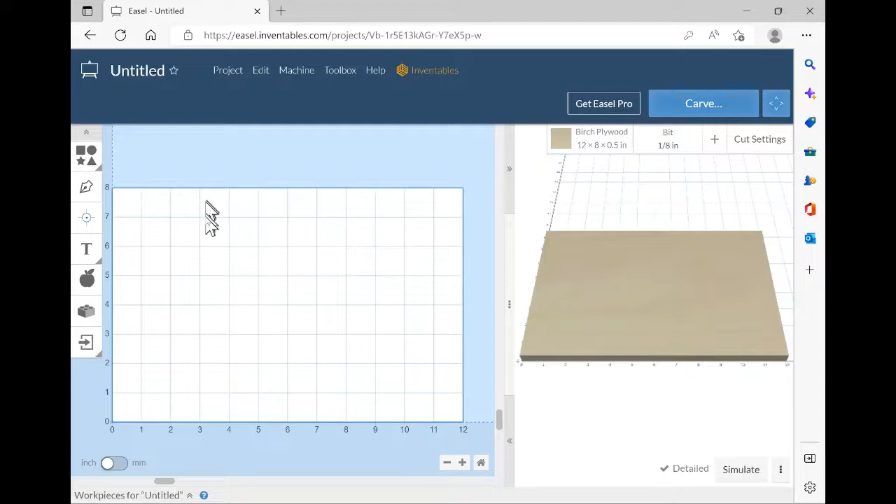For this one, we're going to create a new project. This new project is going to be a knob that we use for clamp downs. We're going to create this a fairly small project, but there's some complicated elements to it, and that's what we want to go through here.

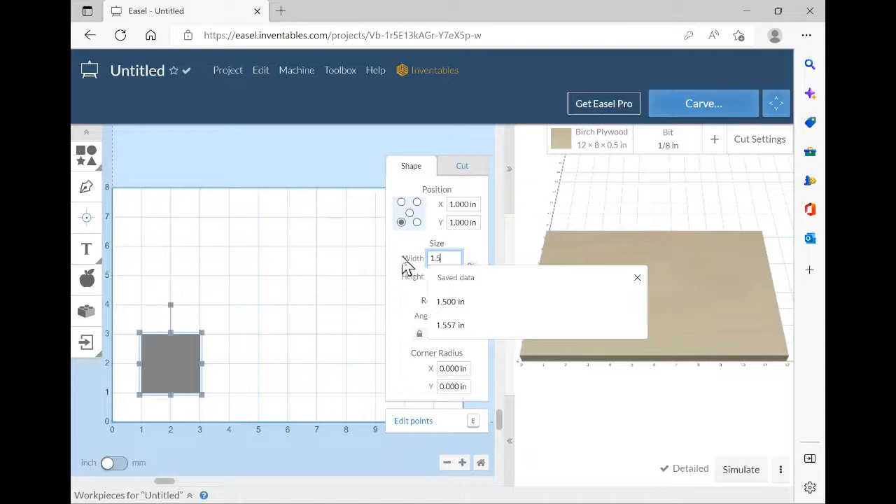So let's start by creating a rectangle. I'll go over here and change the size. It's going to be 1.5 inches wide, and the height is going to be 5/8 of an inch. I can type 5/8 in there, or 0.625.

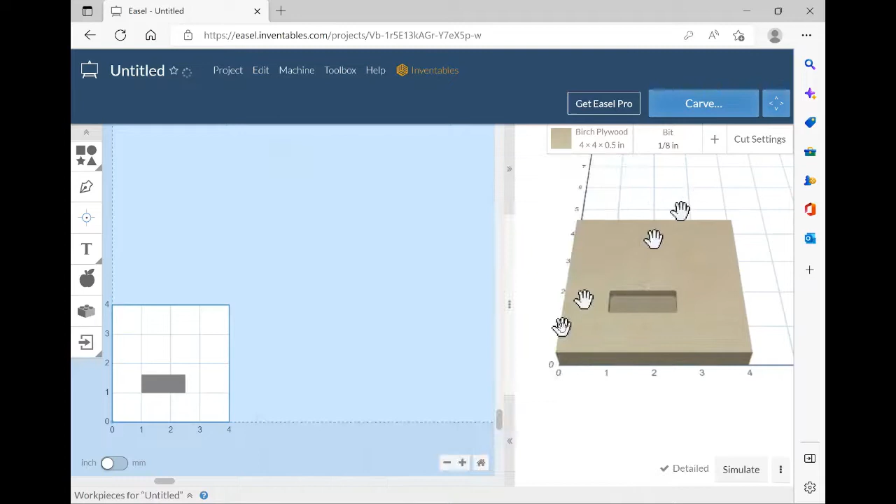Now, that's a pretty small object for this board, and the scrap piece I'm going to be using is kind of small, so let's change this to 4x4 and make it a small board. When I do that, I can use my home button down here and make my graph paper a little larger so I can see it better. I'll click the home button, and now this is centered in there. So I'm going to center that, edit, send it to material.

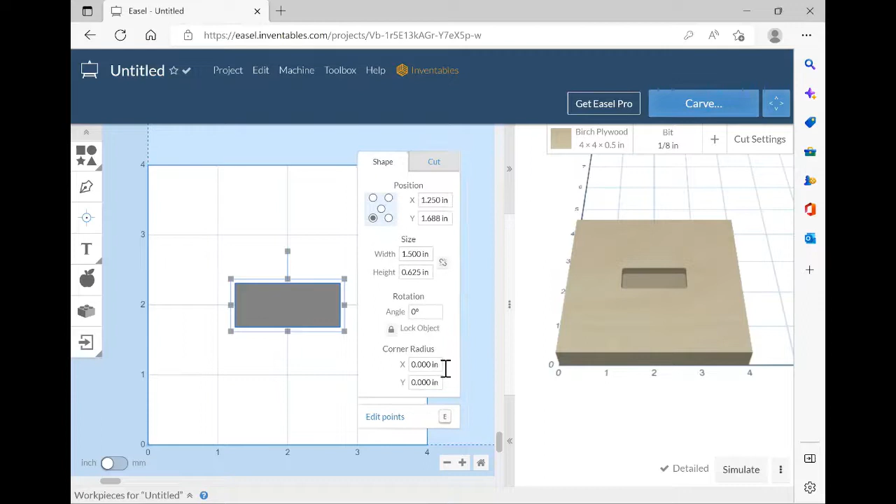Now before I forget, we do want to add some radius to this, so it looks more like a knob. Again, I'm going to add a quarter. Now it's more shaped, more like a knob would be.

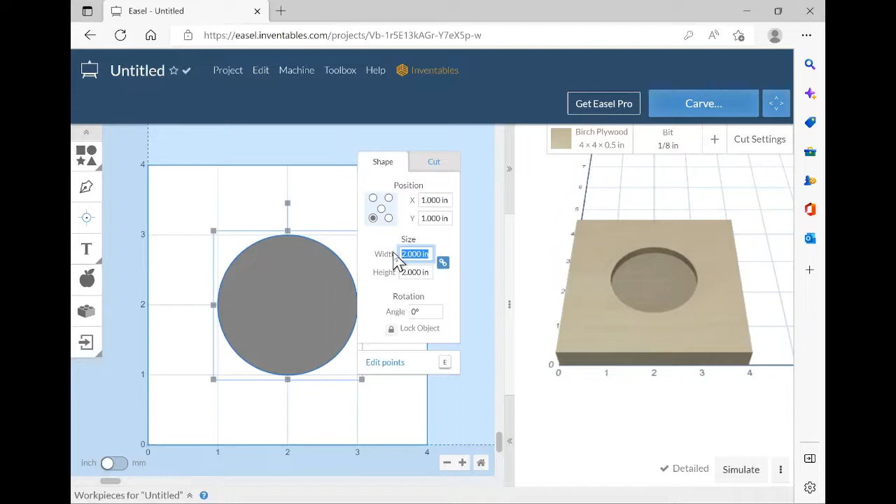The knobs usually have a rounded center, so I'm going to add a circle to the center. In a circle, we're going to link it. Remember, if you do a circle and do the width and height different values, then you have an ellipse. So if you want them both the same to maintain the circle, just click that link button. I'm going to make it 3/4 of an inch, and we're off and running.

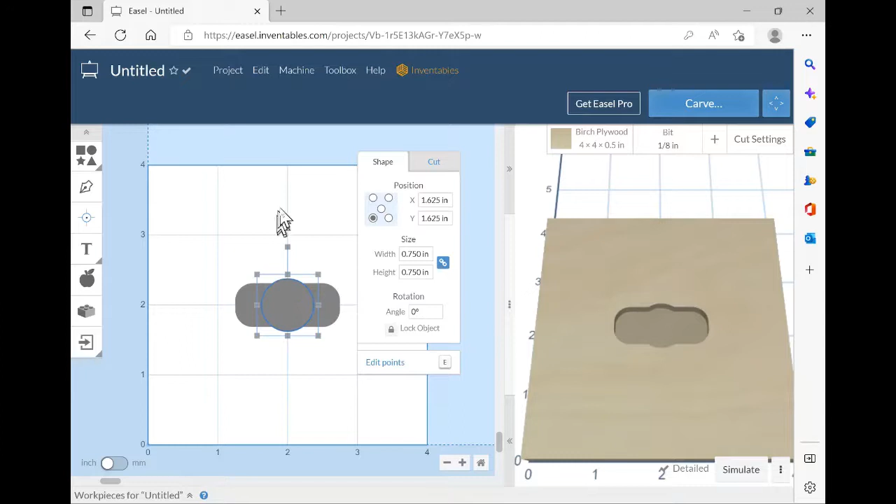Again, same thing, going to center the material. If you look over here now, we see that we have these two objects on top of each other. Over on this side, they create on the piece of wood what looks like the top of a knob, which is great, that's what we want. But in order to maintain that, we need to combine these two. So I'm going to use the combine feature.

Now nothing's changed over here, it looks the same. But now when I click on it, there's only one piece there. I moved it a little bit, so I'm going to make sure it's centered again. So now it's one piece using the combine function.

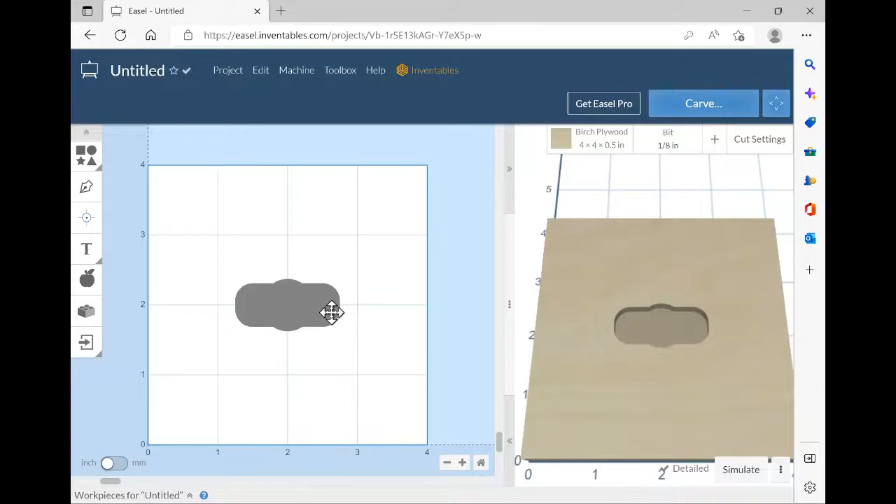Before we go too far, I'm going to copy this. Edit, copy, and I'm going to paste it. Now I'm going to take this and move it over to the side here a little bit. I'm just going to move this out of the way a little.

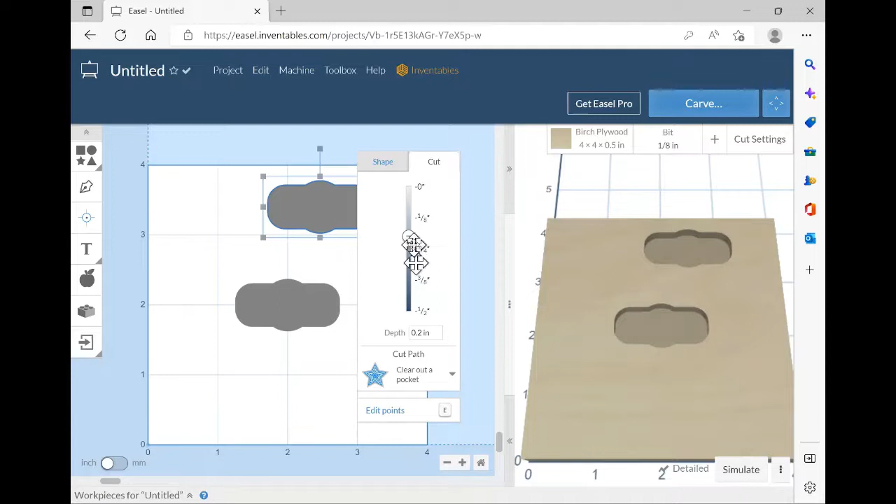Now I'm going to take this and change it. This one we're going to cut all the way through. I'll make a hole, see, there's a hole here. But I don't want to cut the whole pocket out, all I want to do is cut outside the shape. So now it's cutting my knob out.

See it? It also has tabs, and the number of tabs are 4. Let me see if I can move this up a little bit. There we go. I'm going to change the tabs to 2 because I think 4 tabs is a little much, but I'm going to move one to this side. All right, so we have one on that side and one up here on the top.

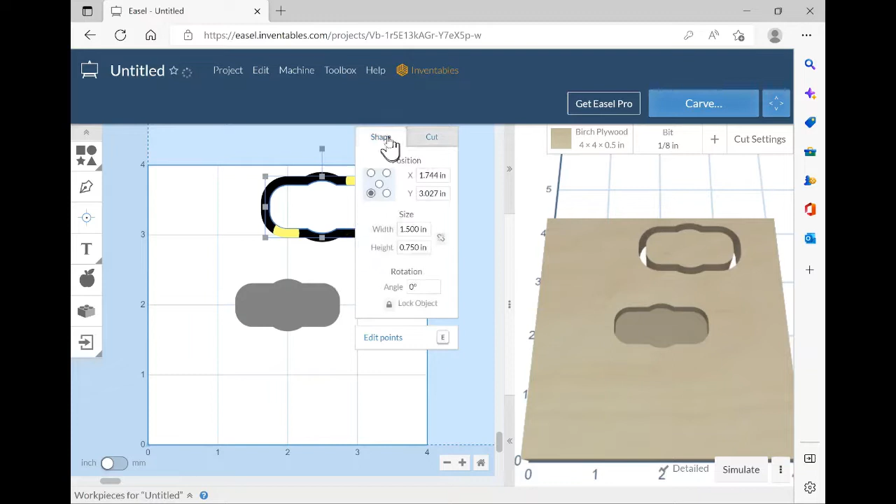Now, if I click on it again, you'll see my tabs. Let me move this out of the way. So now we have an outline to cut out our knobs, and we have 2 tabs on it, so it's ready to go.

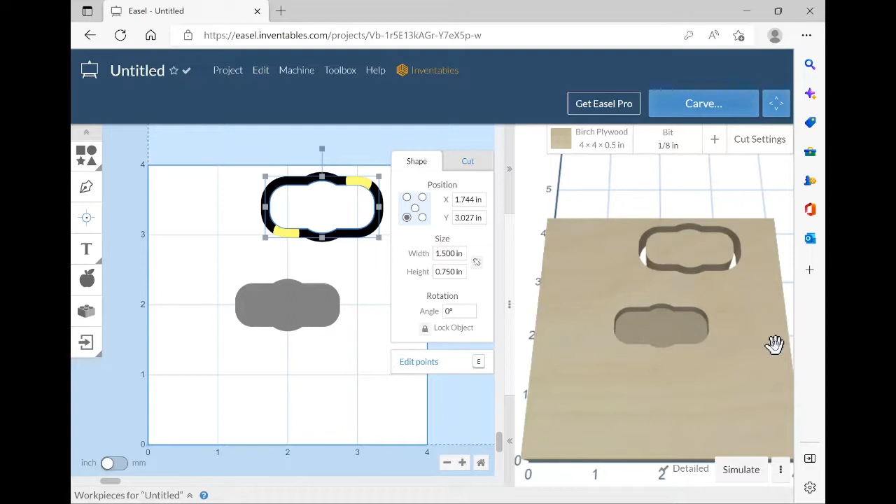At this point, I'm going to remember now the knob itself, the top of the knob is on the bottom of our piece of plywood, so we're working upside down here. So I'm going to put a circle on it again.

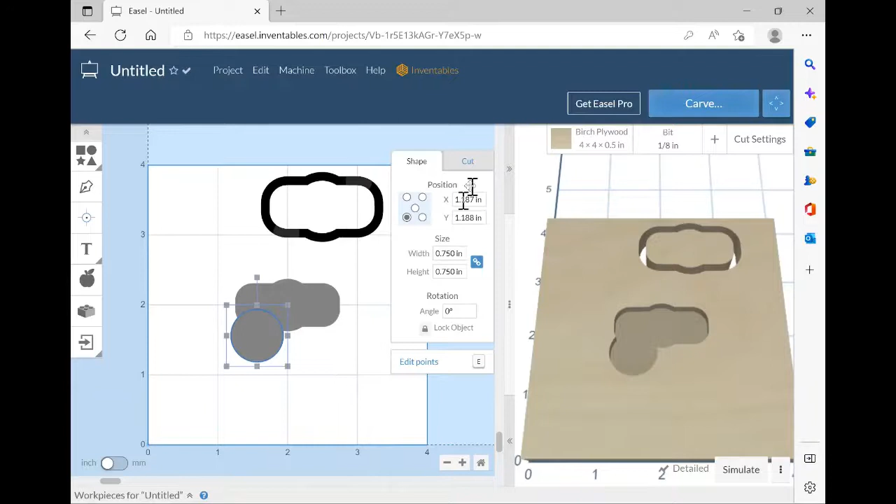Let's add another circle, and this one is going to be, again, 3/4 by 3/4. I'm going to link it so it doesn't become an ellipse. What I'm going to do here, I'm going to move it just a little bit so you can see it a little better. I'm going to change the cut to 0, in other words, I'm not going to cut it at all.

So what have I done? I actually have this thing here, and if we take it and move it into the middle, you'll see that it becomes a part that's not cut out yet. So let me go center this.

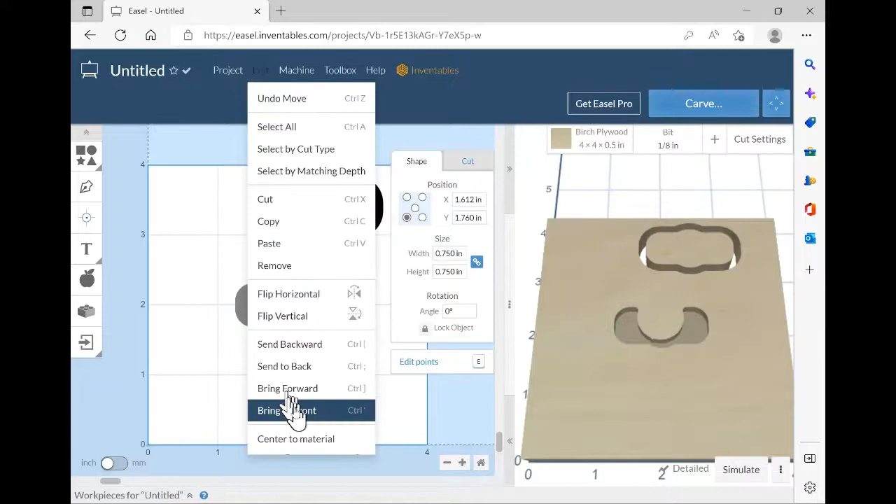Okay, and now if you look at what we have here, and we don't show everything, but if I take this now and put this to the center as well, what do I have now? Look what I have, I have a knob. I have a center portion that's not been cut yet, and I can cut out around the whole thing.

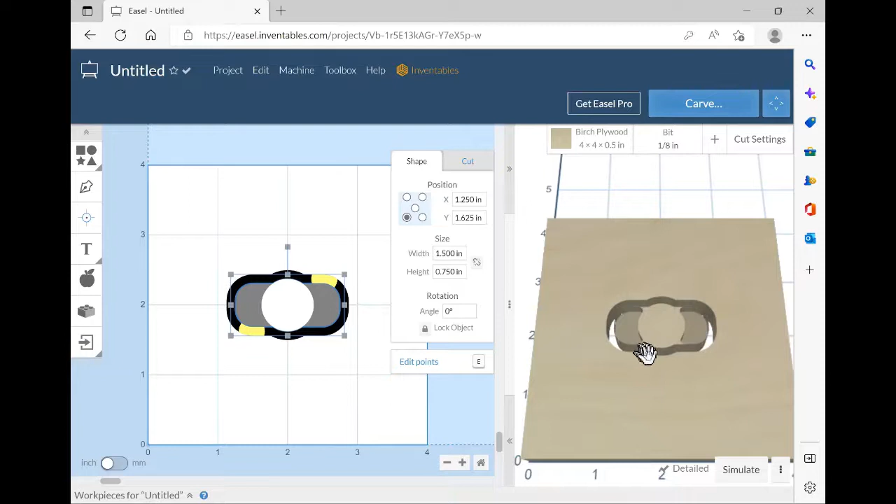Now, if you notice, there's some areas here that have not been trimmed out, see this around here? So now I need another circle. This gets confusing, but I need another circle, and this circle, again, is linked, and it's 3/4 by 3/4.

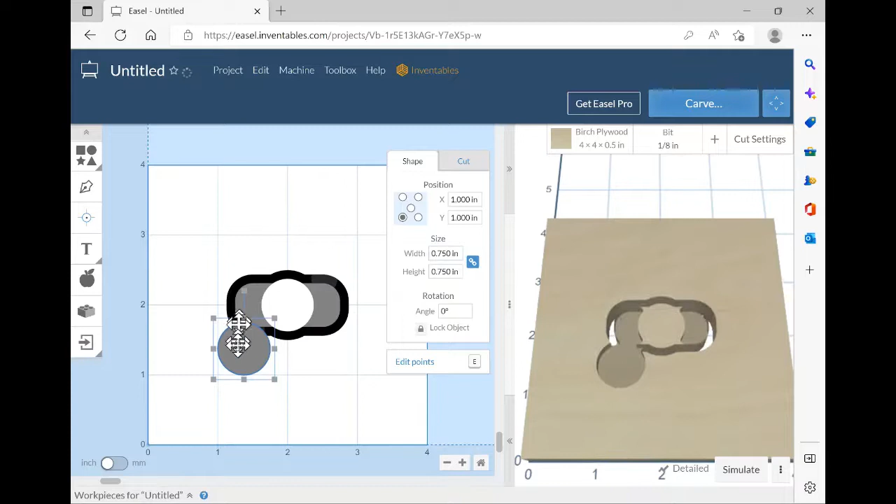All right, and on this one again, we're going to cut outside the pocket, outside the shape path. But here we're only going to cut down as far as the bottom piece here, and that's 0.2 inches. So let's do that, and we're going to center it.

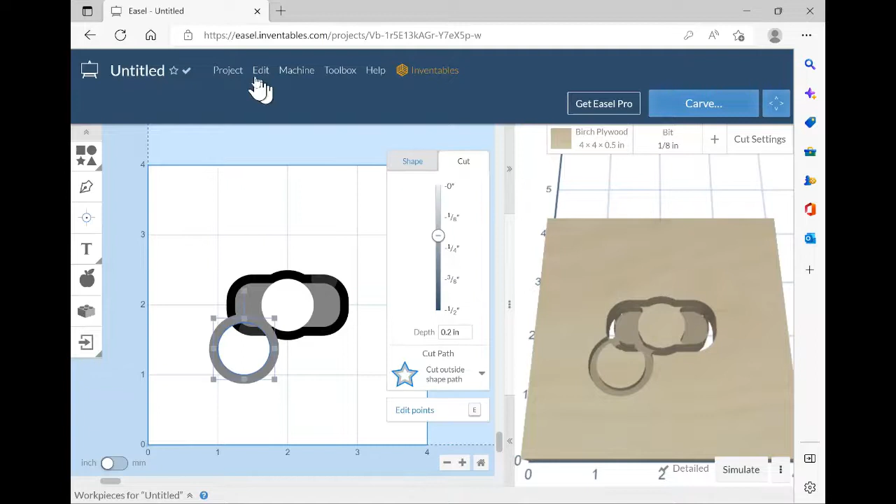Now if you look over here, you'll see that we've actually cleaned up that bit of a mess there. Except now, look where we are here. This doesn't show right, does it?

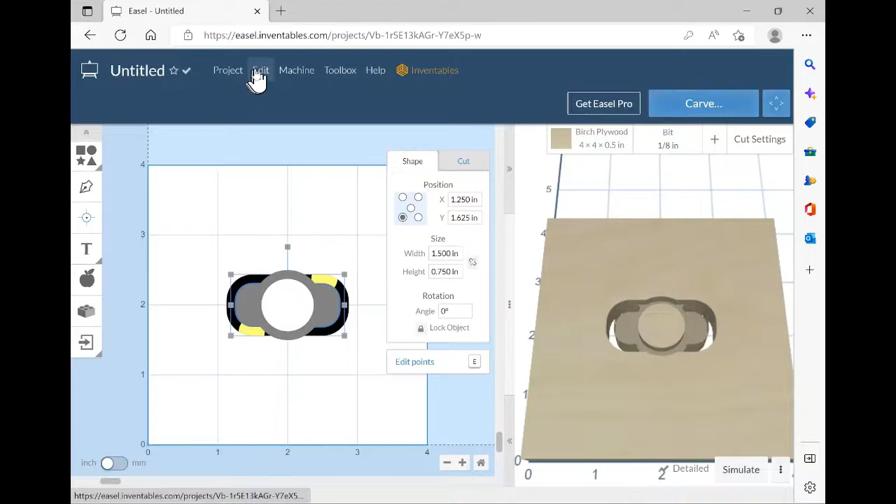Now why is that? Well, the reason for that is this outside cut path that we have here needs to be the last, has to be the front, the last one we put in. So I'm going to bring it to the front. Look at the difference, it fixes the problem, doesn't it? We may have to fix it again, but for now it's okay.

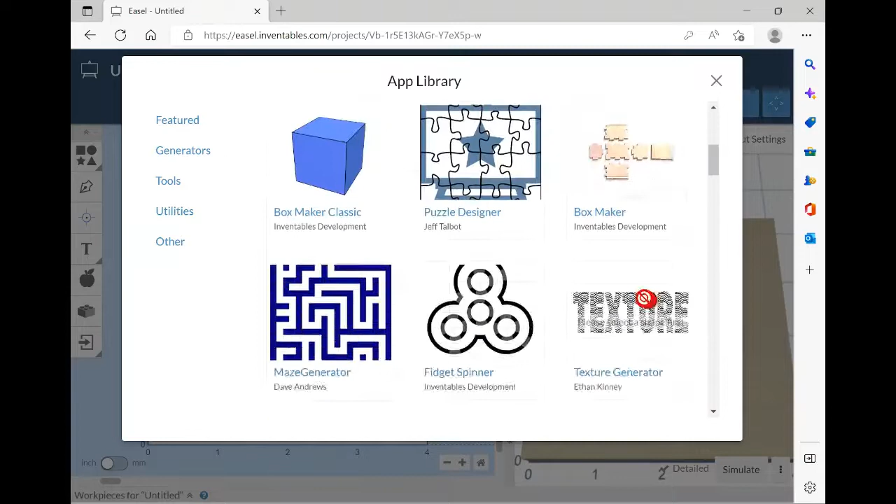All right, so now let's go to our applications and add a hexagonal polygon. So it's a 6-sided polygon. This is really the shape of the nut, and in this particular case we're going to use a 1/4 nut. And I measured point to point.

That's from this point here to this point here on the nut, and it's about 0.5 inches. 0.503 is what it measured when I checked the nut I had. And so half of that, because we need the radius, is 0.2515.

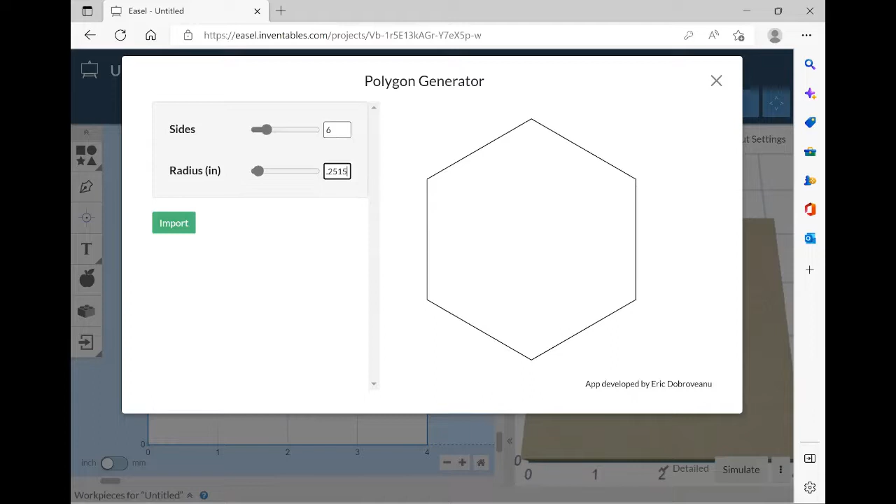All right, so we have a 6-sided figure. I'm going to bring it in. I'm going to import it. And there it is down there.

Now I'm going to take this guy and be very careful with him. I'm going to rotate him 30 degrees. That brings him, makes him flat. Now I'm going to center him.

But first, before I do that, I'm going to change my cut. In this case, I actually want to clear out a pocket, and the pocket is the shape of the nut. How deep do I want it? Well, I think that 0.2 inches isn't bad.

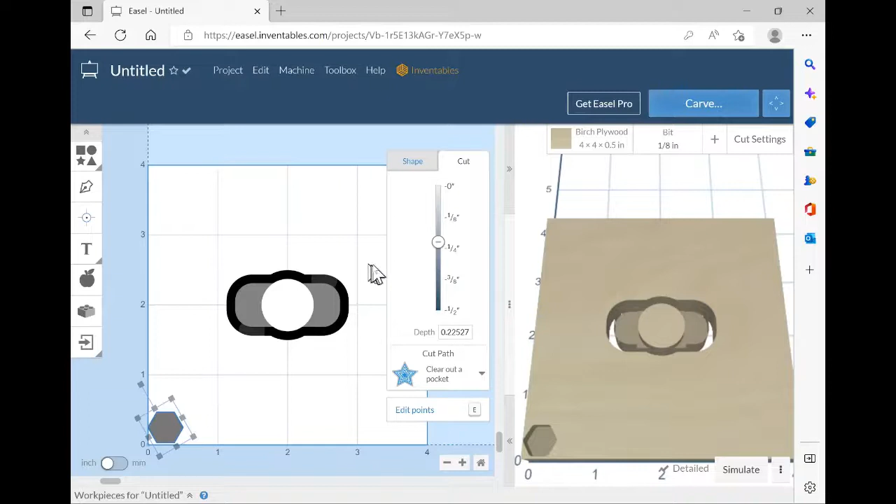Something around there, doesn't have to be exactly that, but because the nut is about a 1/4 inch thick, the one I measured anyway, it's about a 1/4 inch thick. So let's go with that.

Now that's sitting here, and you can see it's pretty much what we want. Now let's center it. Edit, center. Now it's in the middle of our knob, isn't it? And there's our hex nut.

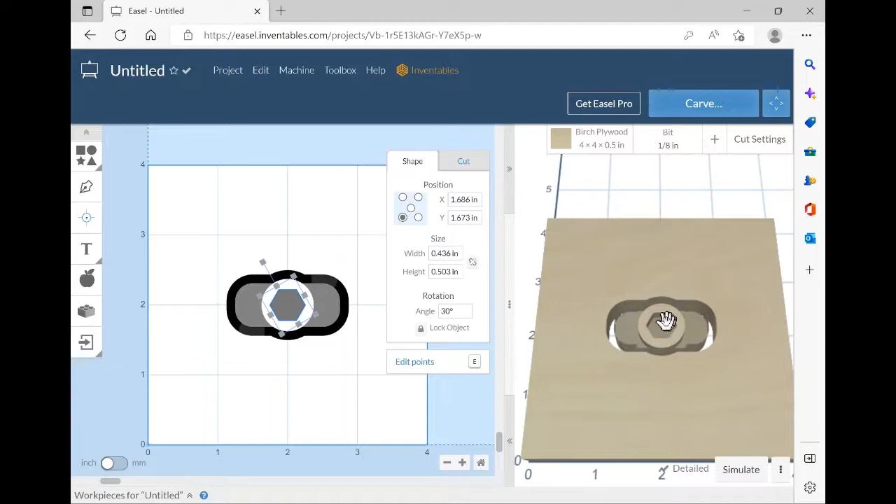All right, well we have to have some place for the bolt to go. So let's go back and make another circle. We'll bring a circle in. This circle now is going to be linked again. You want it to be a true circle, not an ellipse.

This time we're going to make it 0.27 inches. The bolt is 1/4 inch. We want to leave a little clearance on the side, so we're going to make it 0.27.

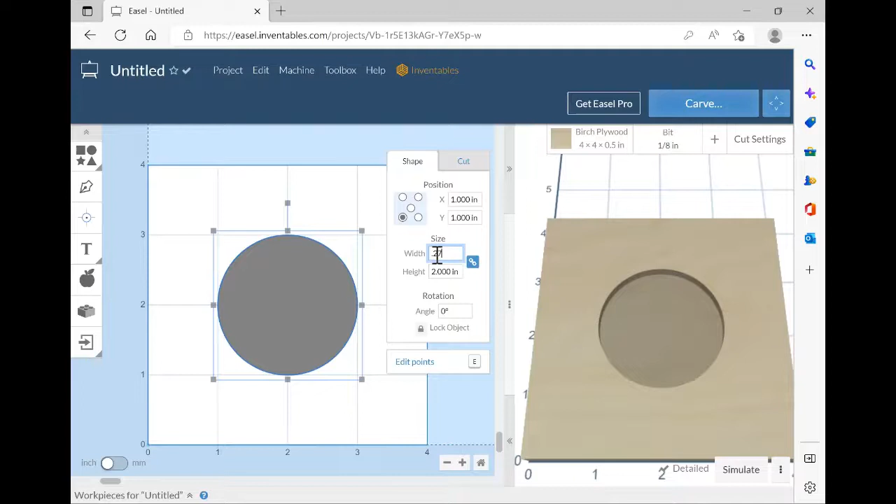And this particular one, we need to cut all the way through, don't we? Because this one the bolt has to go all the way through, so we have to cut it all the way through. And you notice when we do that, we've created a hole, which is what we want.

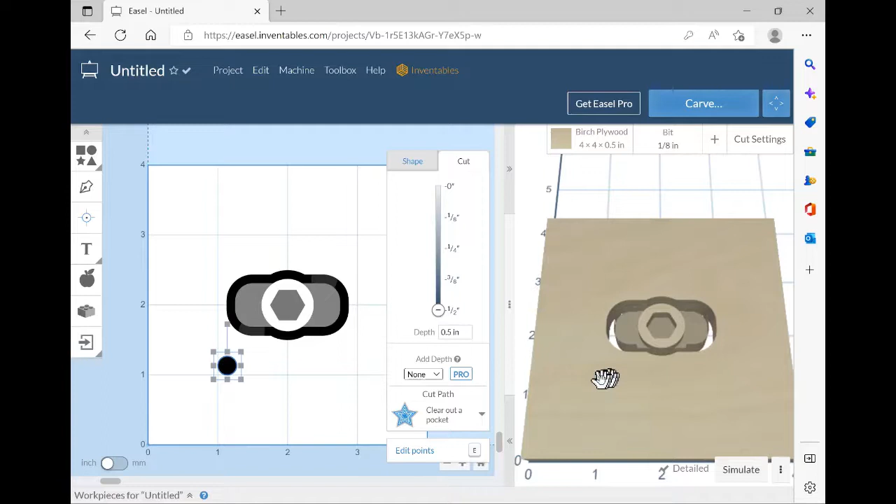And we're going to clear out a pocket. This is going to do a bore, so we're going to be boring this hole, not drilling it, but boring it. Right? So now we're going to edit, center the material again.

So here's what we have. Let's take a look at it. If we go over here to our knob, things are starting to look up here. We have what looks like the bottom side of a knob with the rounded edge. Here we have the wings so we can tighten it.

We have a place to insert our 1/4 nut, and we're going to put a little CA glue to hold that in place. And then we have a hole for the bolt to go through. So this guy is now ready to go.

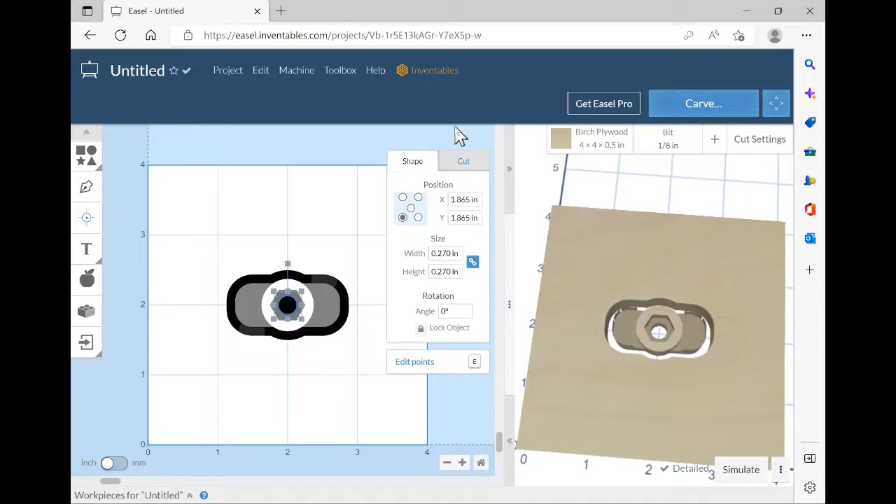But remember some of the things we had to change to work on that. One of them was to make sure that our cut area on the outside here was in the front. I'm going to bring it to the front again to see what it does. Notice no change, because that's where it was.

This one needs to be in the front too, doesn't it? Because it needs to cut that hole through. So you have to have a specific order when you're building these more complex models, and you have to mess around a little with your controls here. You can send it to the back.

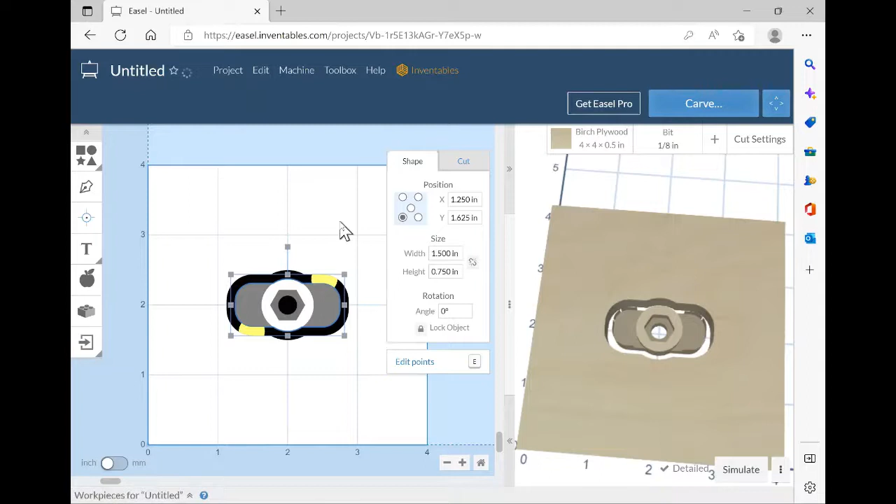In this case, I'm going to send it to the back, and you'll notice it doesn't work anymore. I'm going to do it again and bring it to the front. Now it works fine, but you can bring it up one place if you wanted.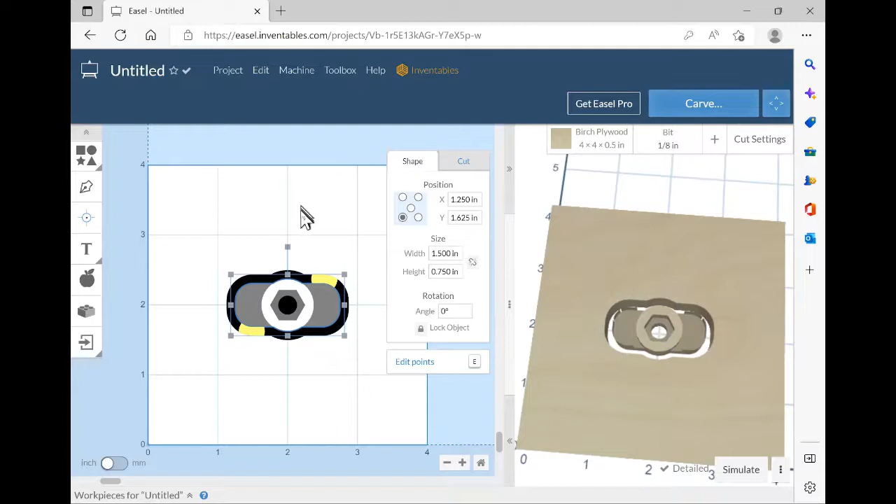So we have set it backwards one click, and that moves it back one click, two clicks. It was still okay. In other words, we could still put it in that position and have it work. And that would leave the last two things we do on top of it. The last two things we did were create the hex hole and create the hole in the middle, and they're not in the way, so this doesn't affect those.

All right, but you have to play around with that a little bit to get a feel for it. So build a model and just move things around a little bit so you're comfortable with that cutout. All right, this is ready to go now.

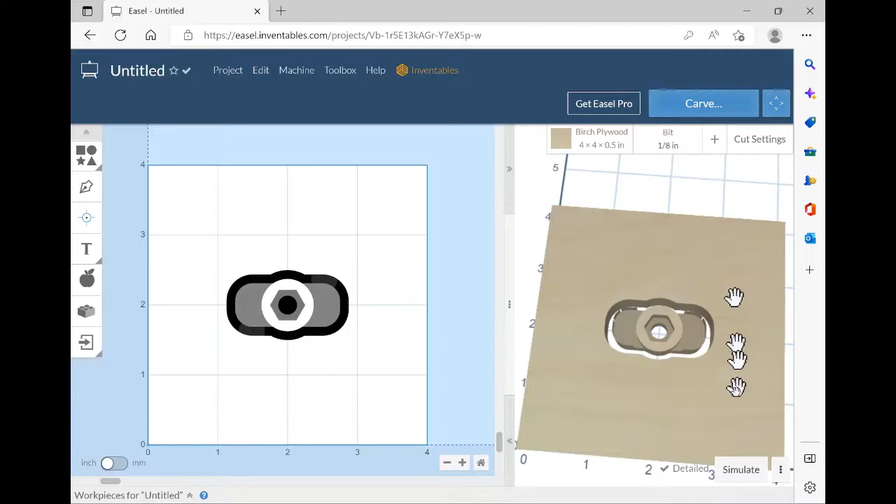One problem I have though is my grain orientation on this particular piece of plywood is in this direction from the bottom to the top. So I'm going to turn this 90 degrees. And let's do that here. So I'm going to turn it 90 degrees. And now it's oriented in the way my plywood is grain-wise.

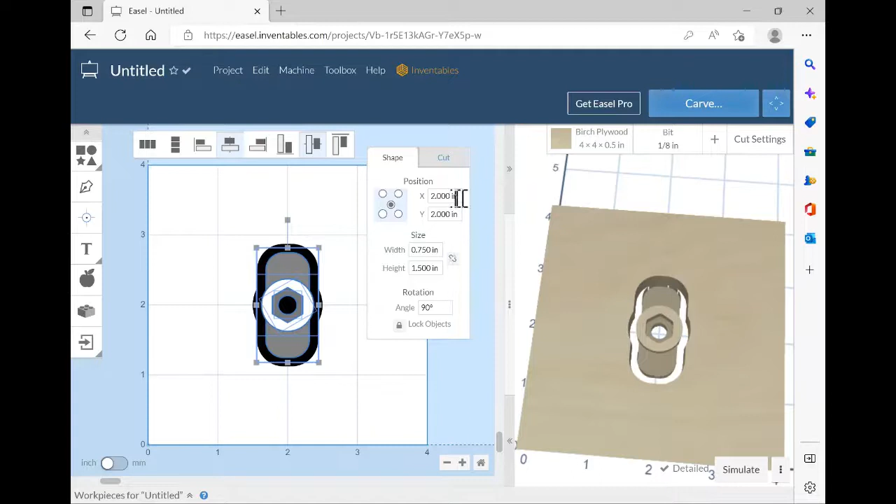And I want to put it down here in this corner. So I'm going to change my X position - let's see, I can't use 1. I'm using a lower left corner here. You know what I'm going to do? I'm going to use a center measurement. Notice now when I go from corner to center, the X and Y positions change. What they're doing is leaving this in the same spot and just adjusting the positions to reference the change.

This time I'm going to make my centers 1 and 1. So now I put it down in the corner here. Why did I do that? Well, I want to make some copies, and I want to leave some room for my clamps. So I left a little room on the bottom for my clamp.

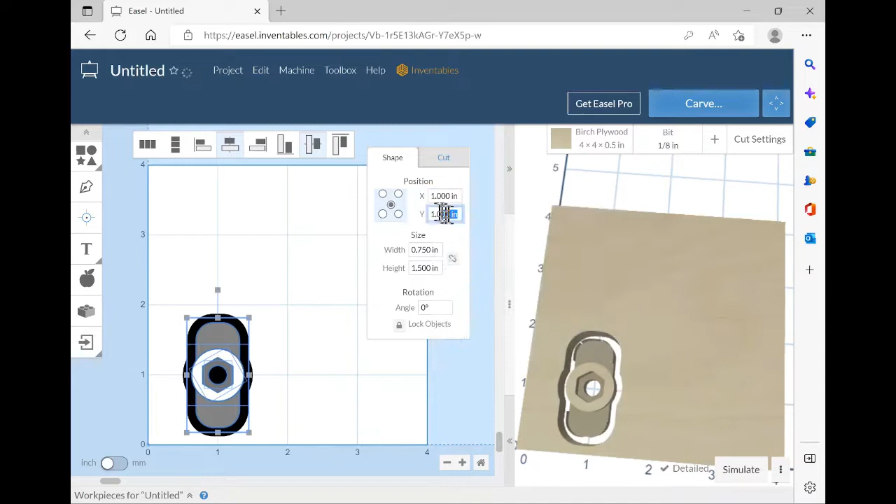Now I'm going to copy. I'm going to paste it. Now I'm on the second one, okay? Now this position, since I'm still in the center, we know my X position, that is from the left side, is still going to be 1. My Y position this time is going to be up top here a little bit - that's 3. Oh, lost my clicker here. Let me go back, Control Z, gets me back. I'll do it again.

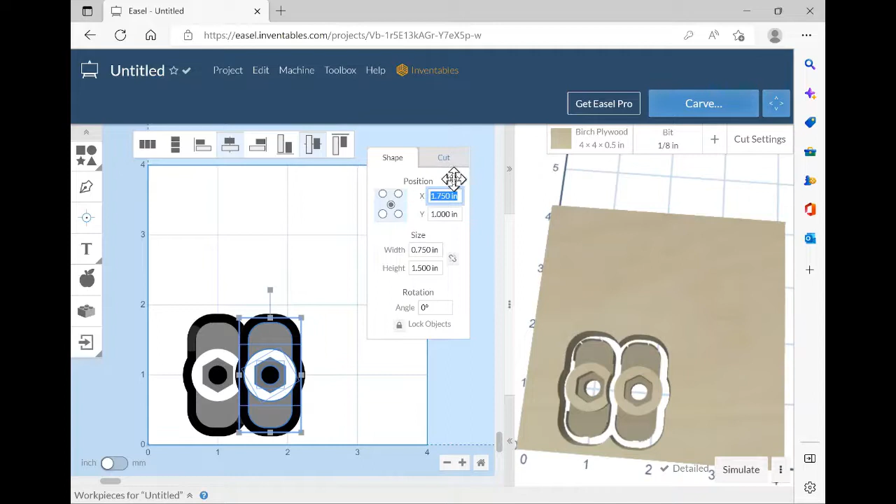All right, and yep, okay. X is 1, we said, and Y will be 3. That's what happened - I put it right on top of itself so you couldn't see it. All right, there we are. So X is 1, Y is 3. All right, that gives me 2 of them.

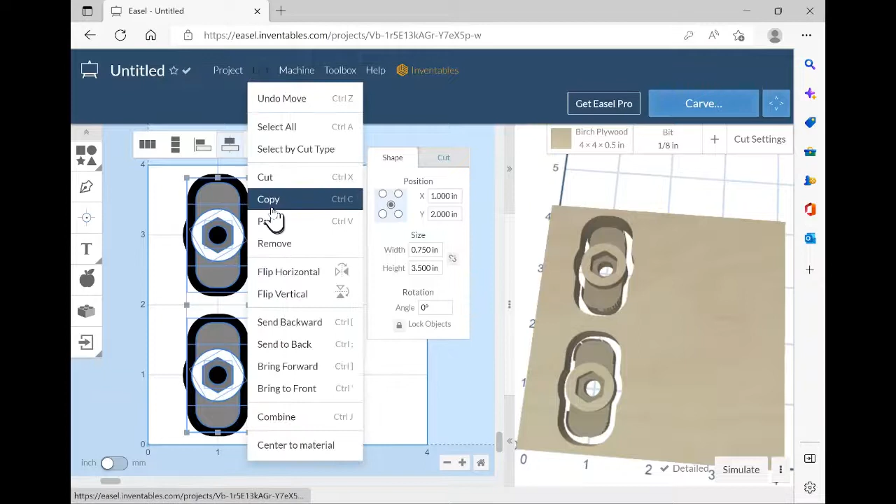But I have room for a couple more over here, so I think I'll copy it again. We'll make 4 of them. So we'll do a copy. And this position, again, Y is going to be the same - we're not going to change that. But X is moving over a little bit. Let's try 3. All right, so now we have plenty of room around to clamp.

We have 4 knobs, I think we're in pretty good shape. But remember, we have this centered - everything is centered here. So if I click on all this, you'll notice that we're centered. So if I were to try and cut this, we'd still reference this point down here.

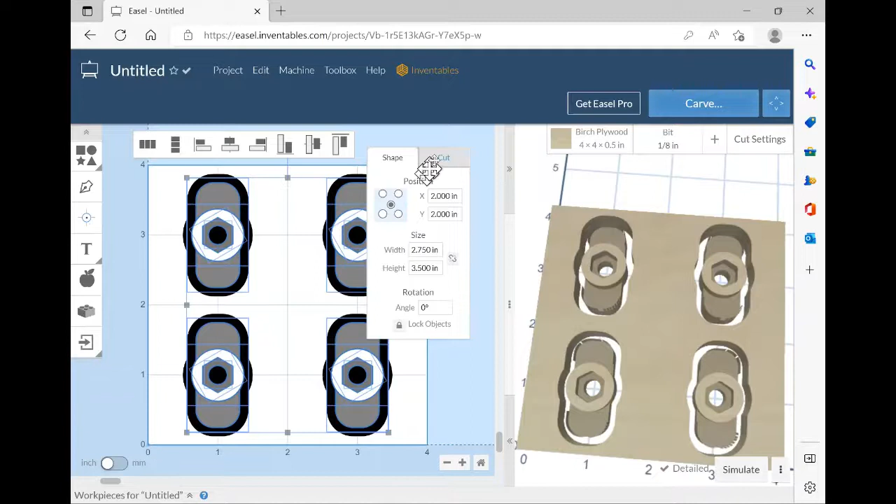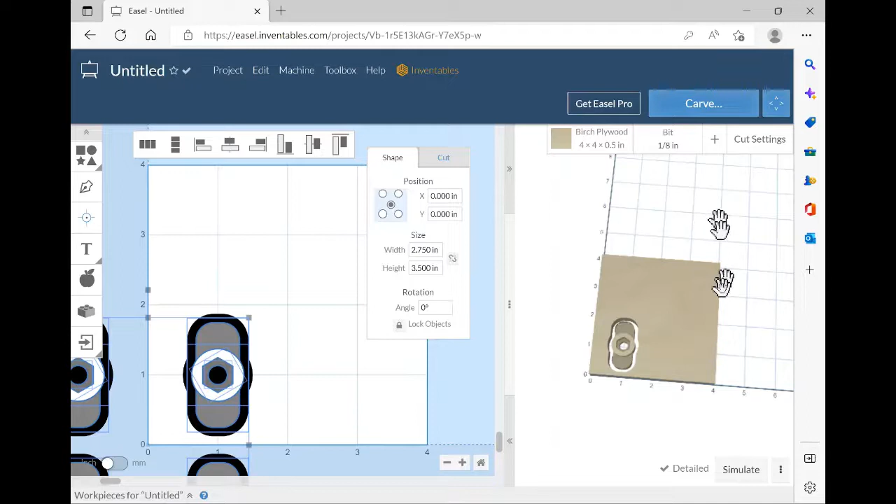However, if I change this position of all of it to 0 and 0, now we reference the center of the drawing. If you go over here - you can't see it here, but actually they're going to cut the knobs out here, and we would center our XY. When we set X, Y, and Z equal to the center of our board to make the cut.

Now I'm going to go back and revert that, all right? Because I don't really want to do that. I'm going to have X, Y equals 0, and I'm going to use the bottom left corner of the board as a reference for X, Y equals 0. So there we are - we have our finished project.

What to do is simulate, see what we have. Now, if you look at it, it's going to take about 6 minutes. So here's what we have, a scrap piece of plywood. And in 6 minutes, we have the outline for 4 knobs. What we do is stick a couple of 1/4-20 nuts in there, and we're ready to go.

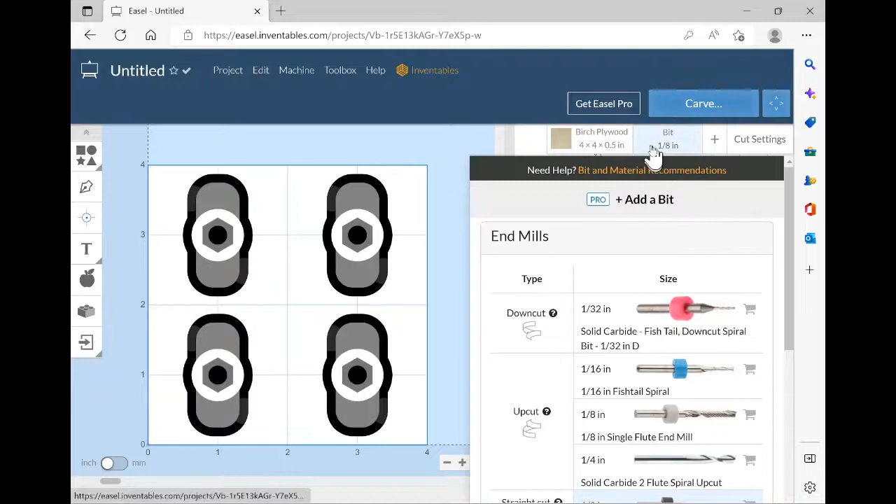One thing I caution you about: when you use a bit in any CNC work, you have to measure the bit itself with calipers. A lot of these bits you buy, they say they're 1/8 inch, but they're really not. Remember, they're all made in Taiwan and places like that, so they're all done in metric. Quite often you'll find this bit is not 1/8 of an inch. 1/8 of an inch would be 3.175 millimeters, I believe. You'll find it's something less than that, closer to 3 millimeters actually. So you have to be careful.

So we'll have to measure our bit before we do a cut here. And what that requires is a special bit, and we can only do that in the Pro version. So once we take this, you can leave this as 1/8 of an inch here, but once we import this over to the computer on the X-Carve, we'll have to make sure that our bit size is correct, and we can change it there if we need to. So just be prepared for that, and just give us something to think about.

All right, there you go. That's the end of that lesson. I know it's a little complicated, a little different, but we did something very practical and useful, and used some scrap wood up. So that's a good deal. All right, see you in the next.